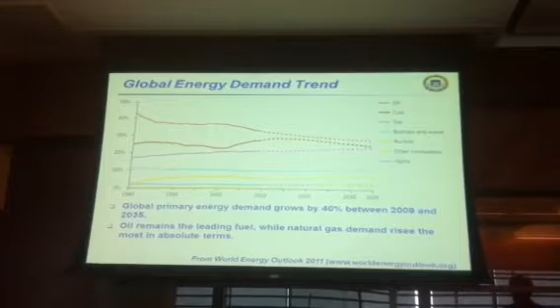And this is the fractional contribution. But the primary energy demand globally is projected to grow by 40%, which means actual usage will increase over time, even way up to 20, 30 some more years. So the message is clear that oil will continue to remain as a leading fuel, while everyone knows there is more potential use of natural gas in the near future. So still, petroleum, combustion, and all these fossil fuels will remain.

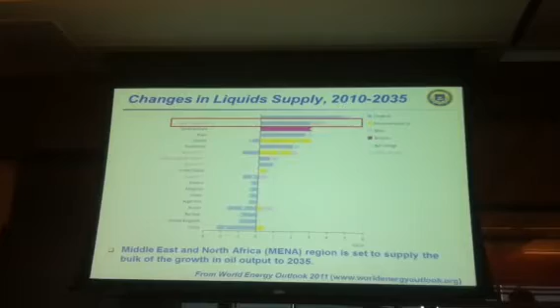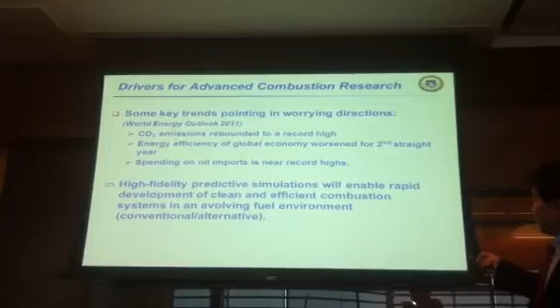And what's also interesting is that the Middle East and North African region is set to supply the majority of this additional demand in oil up to 2035. So Saudi Arabia is way on top here. That makes it all the more interesting for everyone here that we are right at the core, in the place to continue to work on high efficiency combustion systems. So basically there's clearly strong drivers for developing further advanced combustion systems.

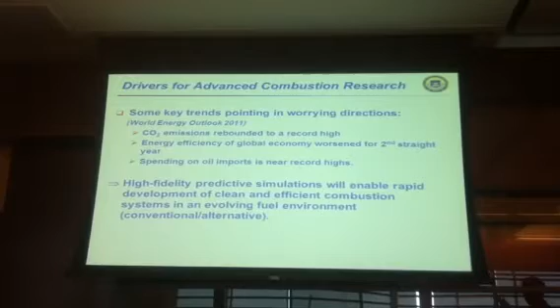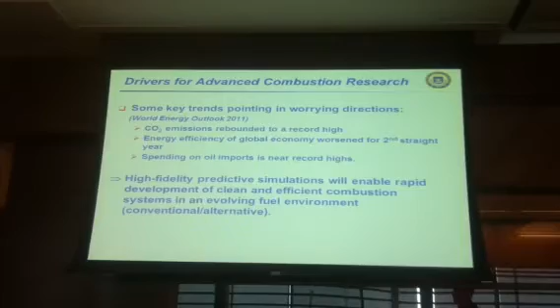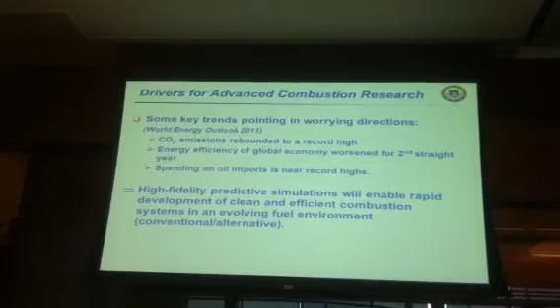Again, there's some kind of bad news that was found out over the last year. The CO2 emissions, despite all this discussion of global warming, has rebounded to record high. So maybe gas prices went down, and whatever the reasons, things are getting worse. That really reminds us that we really need to make a big effort to improve the situation. Energy efficiency also was getting worse, and spending on oil imports is nearly record high. So suddenly there's a big turnaround - people maybe perhaps forgot about all these issues, and things are getting worse.

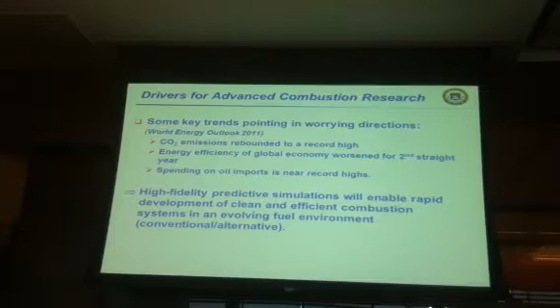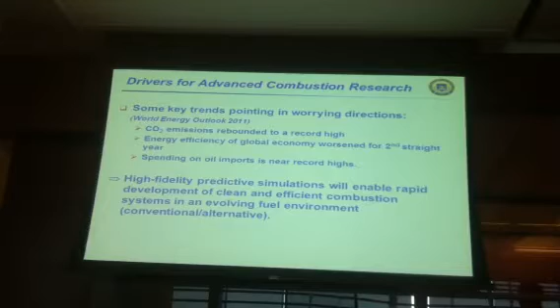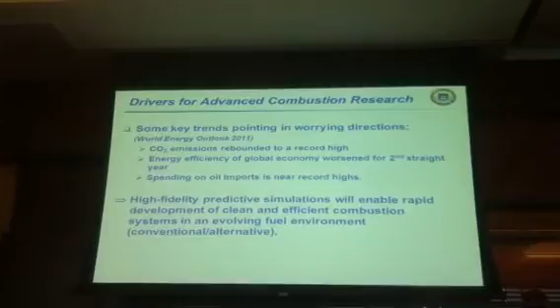There's a continuing demand to develop better high efficiency combustion systems. Based on my experience and research expertise in high fidelity predictive simulation, we are trying to make that amenable to speed up the turnaround of the development of advanced combustion systems.

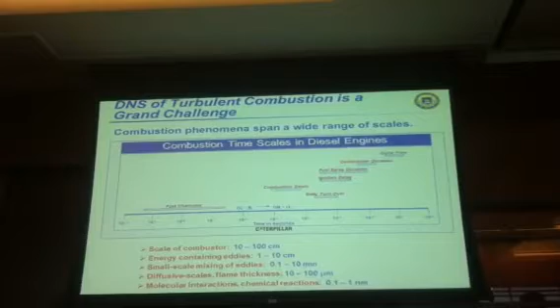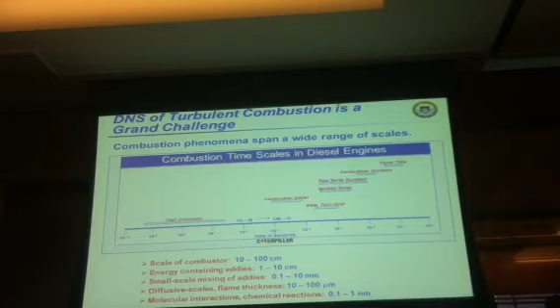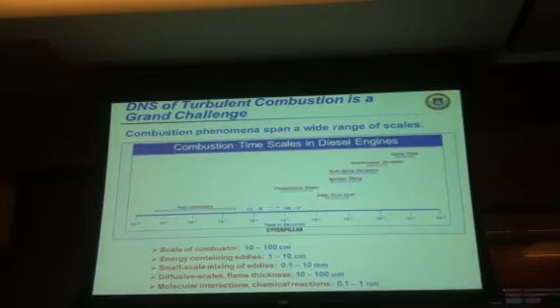My research's primary effort has been direct numerical simulation. The word direct, I re-emphasize, brings up questions. This historically comes from the turbulence simulation community. The word direct means we are not using any subgrid scale or statistical averaging turbulence model. So in a way, we are solving the direct continuum level Navier-Stokes equation without any modeling effort.

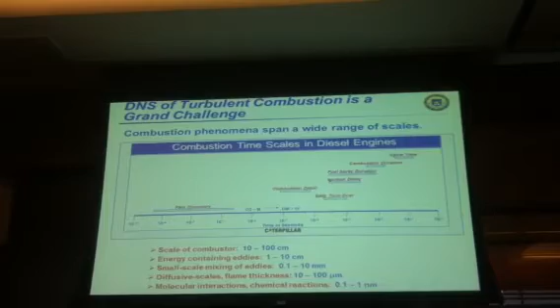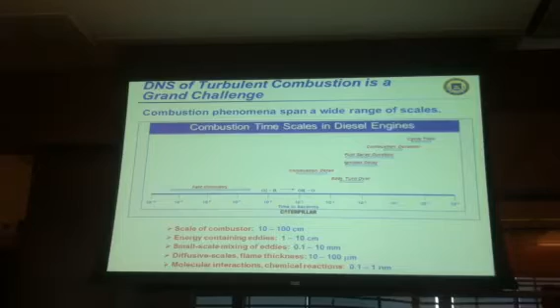When it comes to combustion, chemical kinetic reactions are by nature not at a continuum level, so that is an approximation. In that way, it is not a real first principle simulation from the chemistry point of view, but that's the basic context of the terminology here.

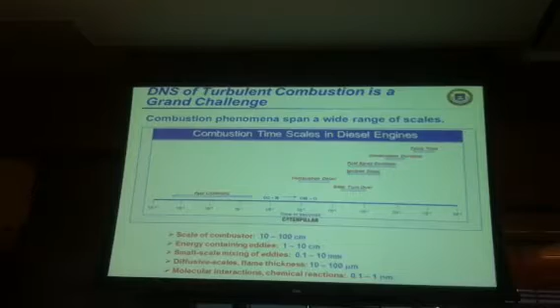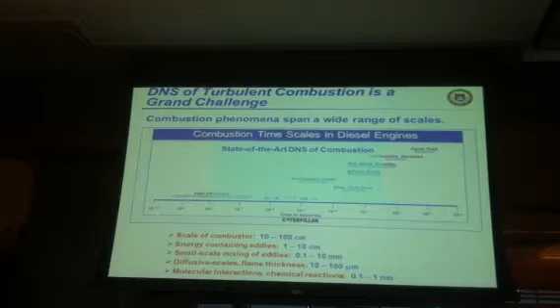High fidelity simulation is great. Computer power has advanced a lot. Nevertheless, just the sheer scale of physical length and time scale is still so huge - it spans over 10 decades, if you think about all the elementary chemical reaction time scales all the way to the device time scale.

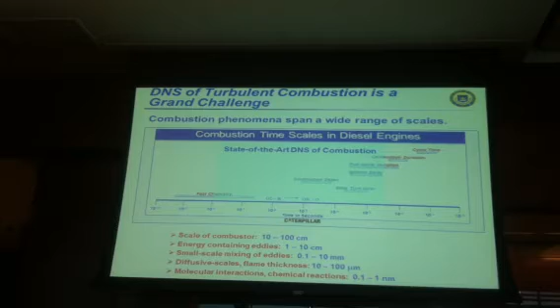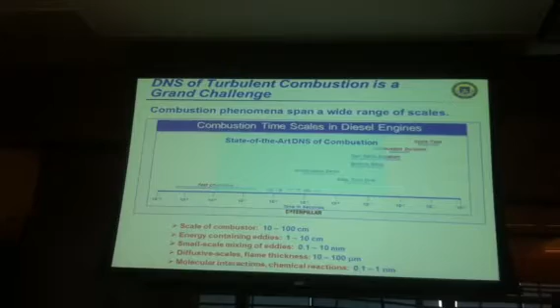This is what we project to be covered by current state-of-the-art DNS, which spans quite a bit, but still it's not enough to cover the whole range. Even that is going to be very, very expensive if you really want to do multi-D, 3D simulations.

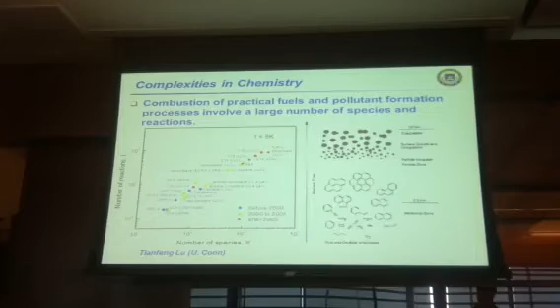What adds insult to injury is that the number of equations becomes very large if you want to simulate with realistic fuel. This shows a trend taken from Tianfeng Lu, the recent trend of mechanism development done by chemical kinetics researchers. We are developing all the way to C16 these days, and the number of species are thousands and number of reactions are tens of thousands.

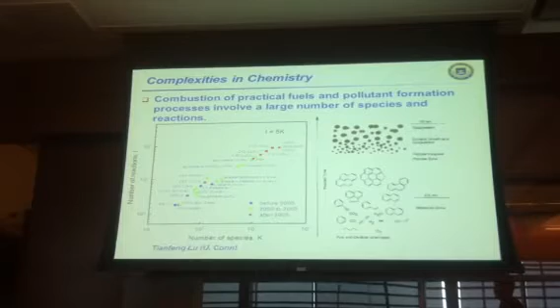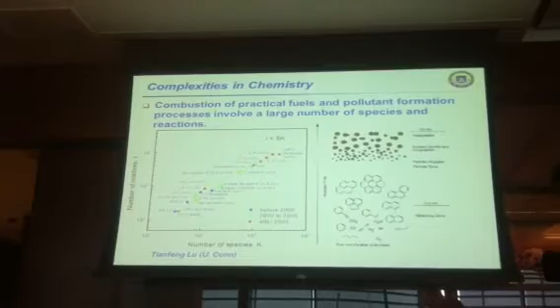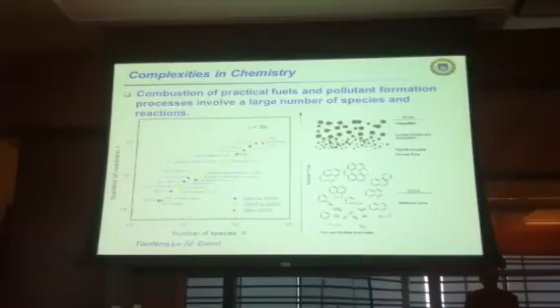This is enormous - in addition to your Navier-Stokes equations, you have to add that many transport equations into the system, which makes it incredibly expensive. So there is still a strong need - as much as we want to develop real high fidelity, accurate reaction rate and chemical mechanisms, by the time you want to apply that into your DNS, we still need to reduce it down to an amenable level. There's still active research effort going on in that area.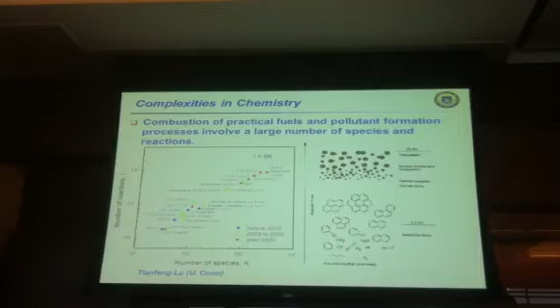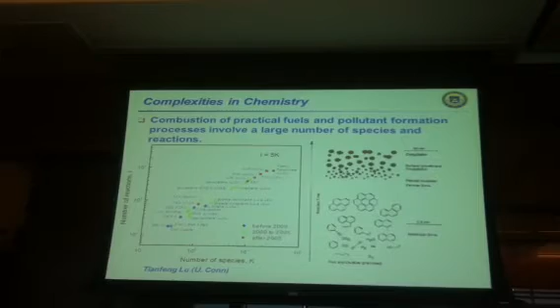If you want to further predict pollutant formation, more particularly soot formation, that alone is another whole new can of worms, and that requires a very complex chemical description - not only gas phase formation of PAHs, but also additional soot growth models need to be implemented.

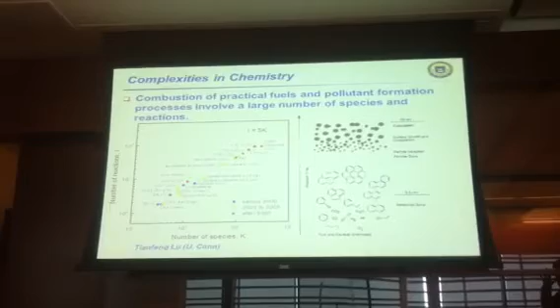This was a subject that I covered last October, so I think I'm going to keep it to a relatively simple level this time.

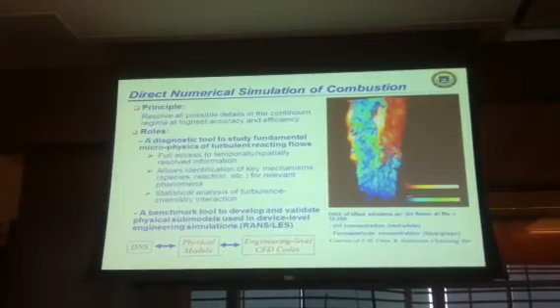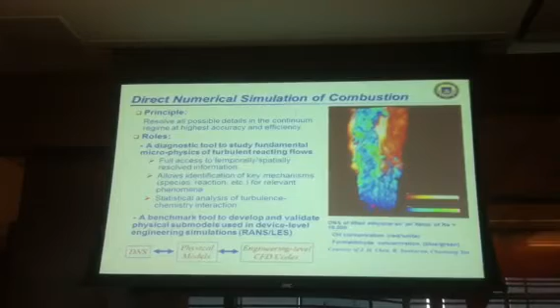Direct numerical simulation of combustion has been around for a few decades, and it has already come a long way. Once again, the basic principle is we would like to resolve all the continuum level details. Since accuracy is really important, we try to take good care of the computational methods involved in that.

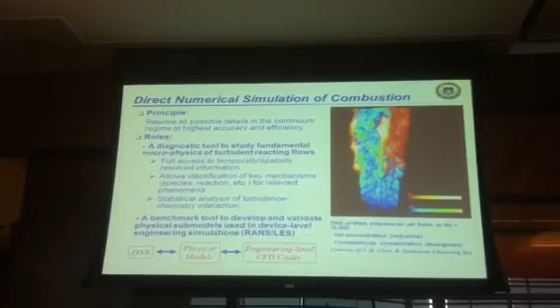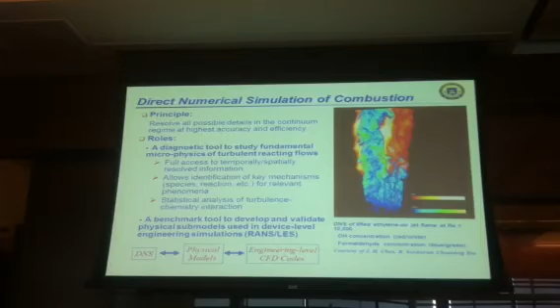The premise of DNS is that since you have full access to temporal and spatially resolved information, it serves by itself as a numerical experiment database. So you can explore and investigate these databases to understand exactly how things evolve in time and what the interactions are between turbulent eddies and flames and so on. Those are really fundamental science studies themselves.

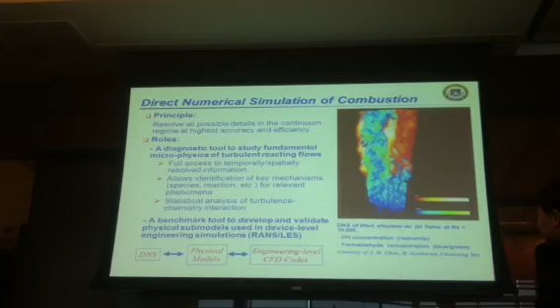But also, the DNS is really expected to play an important role in developing physical combustion submodels that can be utilized in engineering level commercial code for CFD simulations.